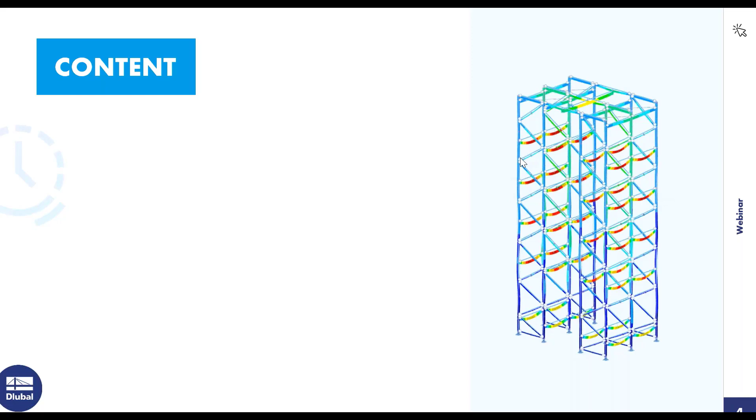Today, I will first show you the calculation workflow and then the modeling of special cross-sections in RSECTION. In the next step, I present the structure and the loads and go into the imperfections and the combinatorics. Then I design the cold-formed cross-sections in steel design and evaluate the results.

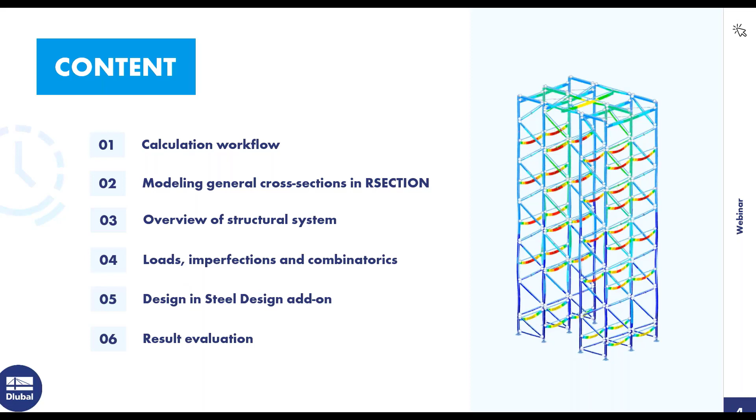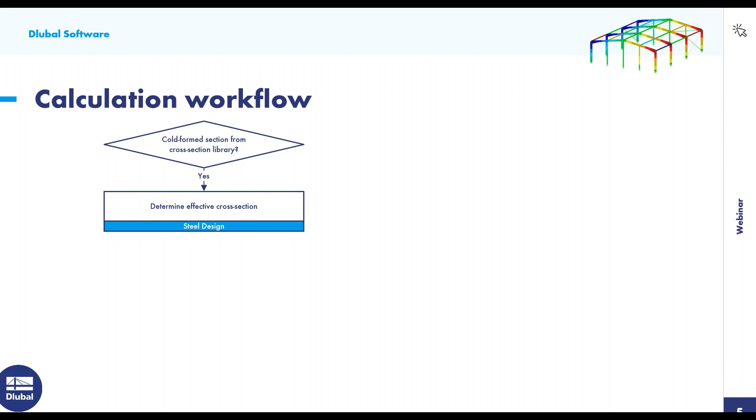If the cold-formed cross-section is included in the cross-section library, you can use this cross-section and determine the effective cross-section in steel design. If it's a special profile, you can create this cross-section in RSECTION. In addition to the steel design add-on, the RSECTION program and the effective cross-section extension are required to determine the effective cross-section in steel design.

It's also possible to determine the effective cross-section in RSECTION. However, this is not necessary for a design in steel design, but it can be used for the preliminary design.

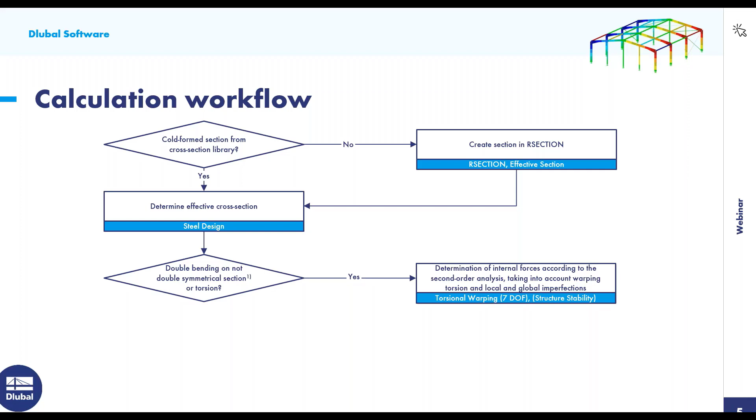No stability design is described in the standard for double bending of non-doubly symmetrical cross-sections or torsion. However, the standard allows a calculation according to the second-order analysis with the approach of global and local imperfections, taking into account the warping torsion.

In this case, only cross-section checks are required since all stability effects are covered by the calculation. The add-on required for this is warping torsion. If you want to determine the imperfection to be applied from the mode shape, the add-on structure stability would also be required.

I would like to point out that the draft standard of Eurocode 3 Part 1.3 contains a new stability design for biaxial bending in combination with axial force for single symmetric cross-sections.

If there is no double bending at the non-doubly symmetric cross-section or torsion, the stability design can be carried out using the methods described in the standards. In addition, cross-section checks and serviceability limit checks are also possible. Stability design checks and serviceability design checks are not implemented in steel design right now, but we are working on it.

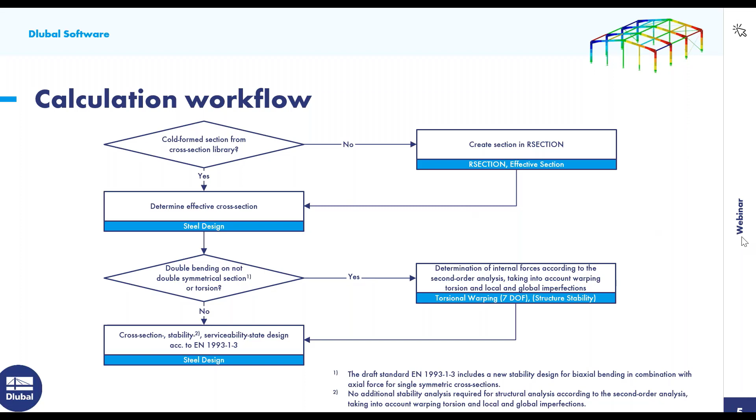The cold-formed omega cross-section that I want to use as an upright is not included in the RFEM cross-section library. I therefore create this cross-section in RSECTION. For this, I open the program RSECTION first.

The cross-section geometry is available as a centerline model in DXF format, so I can use the import function. For this, I start the import, go to Import DXF, and then I choose the corresponding DXF file and click on Open.

In the import dialog, I select the option to create elements on center lines, and here I define a thickness of 3.5 millimeters. With this import function, the part and the elements are generated automatically.

Elements are required for the calculation using the thin-walled analysis and for the calculation of the effective cross-section, since only then the subpanels are available. The subpanels are required for the classification and calculation of the effective cross-section. If no elements are defined, the cross-section is treated as a class 3 cross-section in the design add-ons.

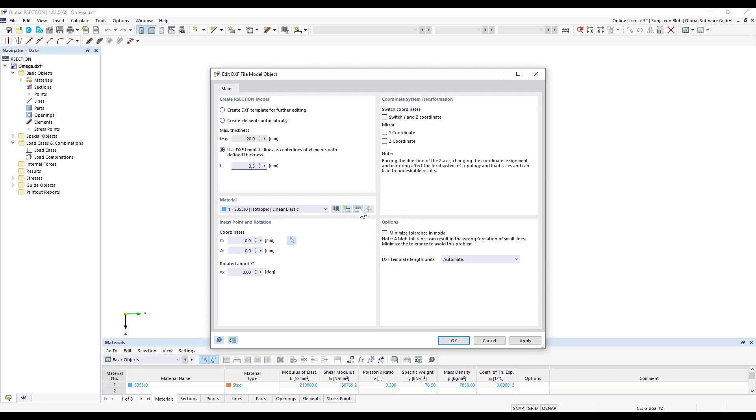Furthermore, I have to select the material. Here the material is already selected that I wanted, but if this is not the case, I can select it from the material library. You can open this material library via this button, and then select the material that you want to use.

Then I start the import. And the necessary part, you can see it here, is already created, and also the elements. If you click here on it, you can see the elements in yellow in the working window.

I want to choose the thin walled analysis. For this, I open the base data dialog, and here I choose the analysis method thin walled analysis. As already mentioned, elements must be defined for this. This setting affects the default setting in RFEM. If necessary, I can change the analysis method in RFEM.

Furthermore, I select cold formed as the manufacturing type, so that the design is carried out according to the standard for cold formed cross sections and steel design add-on. Currently, it's also necessary that the effective cross section according to EN 1993 part 1.3 is also selected here.

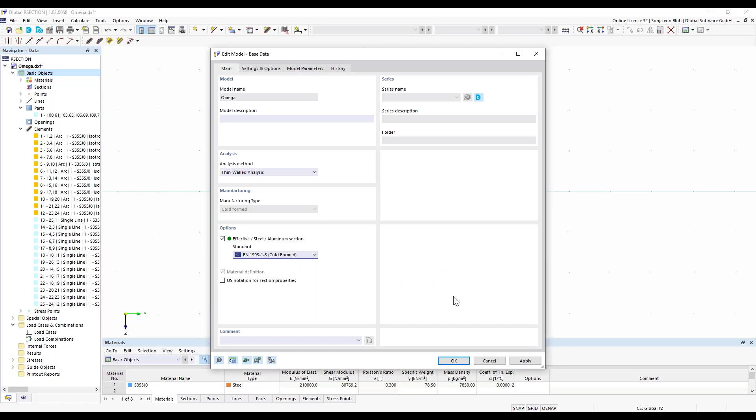However, this will no longer be necessary in later versions. In RSECTION, I can also calculate the effective cross-section and the stresses. This is useful, for example, for a preliminary design. This has been demonstrated in previous webinars, so I won't go into it today.

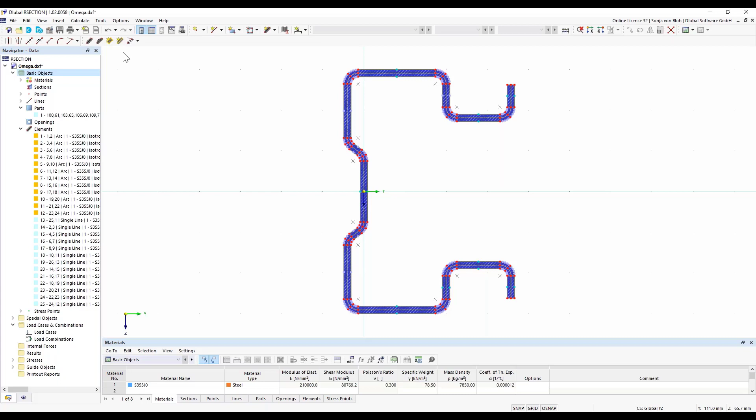However, it makes sense to start the calculation. I do this, and maybe we can also control the generated subpanels. That's okay, and then I save this cross section.

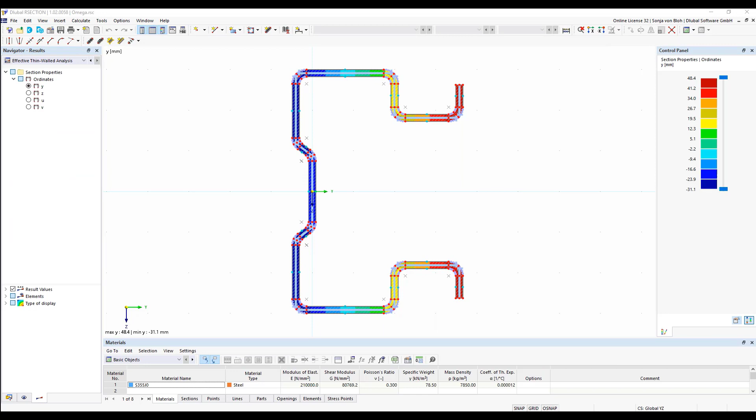I have already created the rack in RFEM 6. For this, I open the rack in RFEM 6 now. The uprights consist of the omega cross-section I just created in RSECTION.

I first import this into RFEM. To do this, I double-click on the uprights and then I open the cross-section library and click on From RSECTION. Then I choose the omega cross-section I just created in RSECTION.

The option Thin Wall Model is activated. This setting was taken from the chosen analysis method in RSECTION. However, I can also deactivate this option here so that the calculation of the cross-section properties is then carried out using the finite element analysis. If this option cannot be selected, then no elements are defined in the RSECTION cross-section.

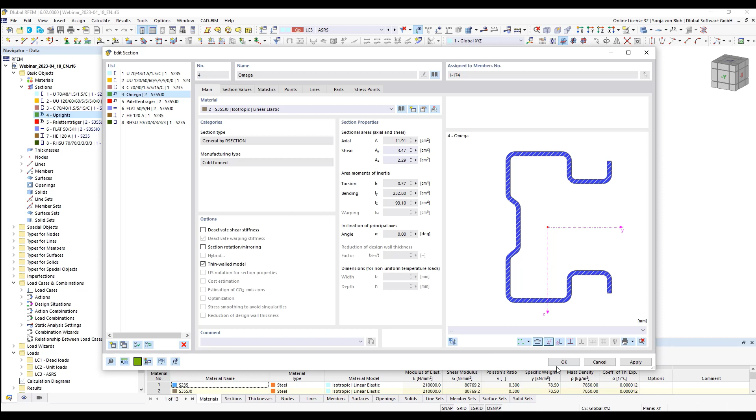Furthermore, the manufacturing type is set to cold formed. This setting was taken from the setting I defined in RSECTION for this cross-section. The special cross-section is also used as a beam. Here, these cross-sections are also created with RSECTION.

I open such a member here. The beams are connected to the uprights with screws. The connection stiffness is represented by a rotational spring. For this, I created a hinge.

I go to the top hinge and I show you the hinge now. Here a rotational hinge is defined with a spring constant.

In the cross-aisle direction, the rack is stabilized by a bolted framework made of cold form C sections. I open such a member here.

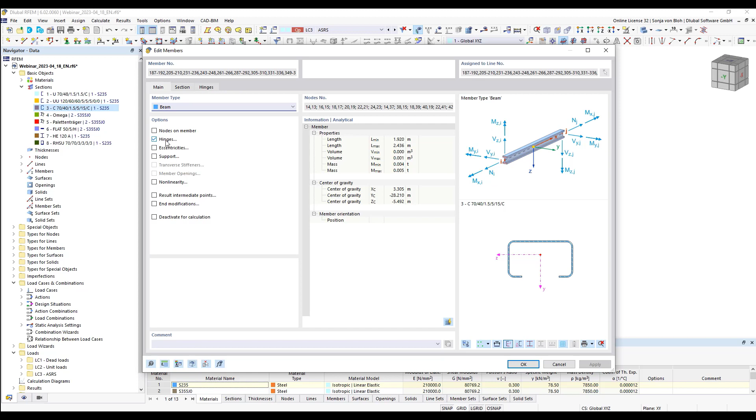In order to consider the shear stiffness, longitudinal springs at the ends of the bracing members are applied. Here hinges are defined. I show you this here. And here a translational hinge is defined with a spring constant.

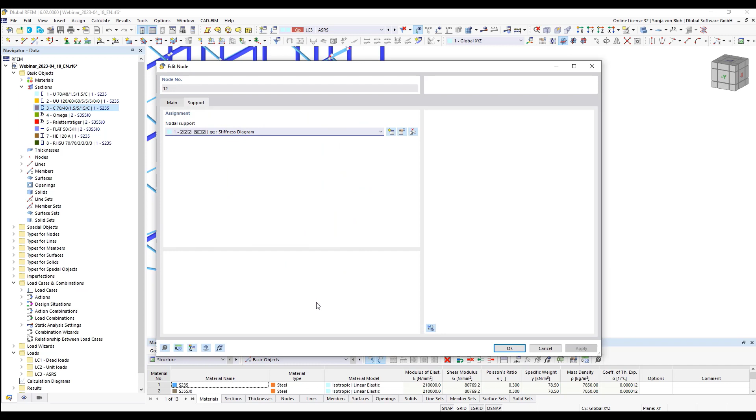The partial restraint of the upright base depends on the contact pressure between upright base and slab. Therefore, the rotational stiffness is to be taken into account. And here I show you the support.

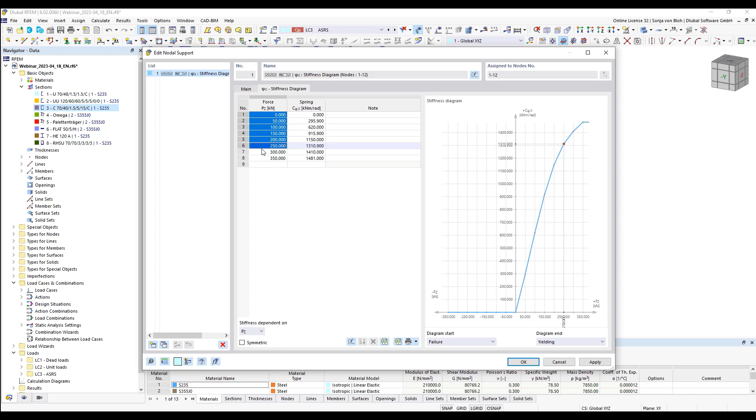Here a stiffness diagram is defined for the rotational stiffness, and the rotational stiffness is not considered as a constant but as a variable that depends on the compressive force. The stiffnesses of the joints are fictitious in this example and can be determined experimentally.

For example, the goods are placed by automated storage and retrieval system. The automated storage and retrieval system is guided on a rail on the floor and on a guide rail in the rack and aisle in the racking head. The aisle bar here serves to introduce the horizontal loads into the rack.

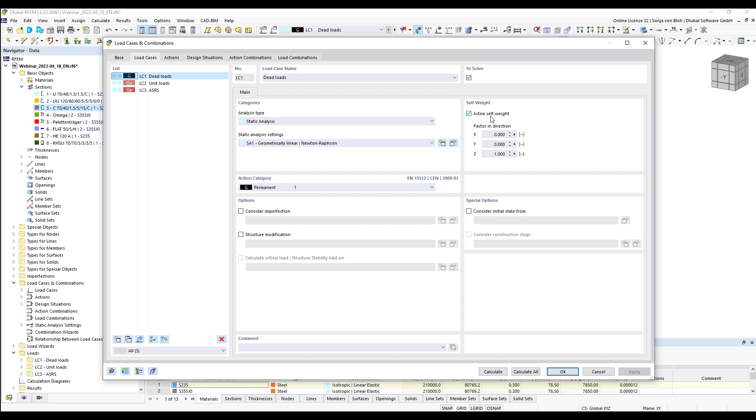Load cases are created for the dead load. I open here the load case for the dead load. Here the checkbox active self-weight is activated so that the self-weight is automatically calculated.

There's also defined a load case for the unit loads. I show you the unit loads here. The loading on the beams is assumed being distributed uniformly over the length of the beam. The unit load acts at the top of the cross section.

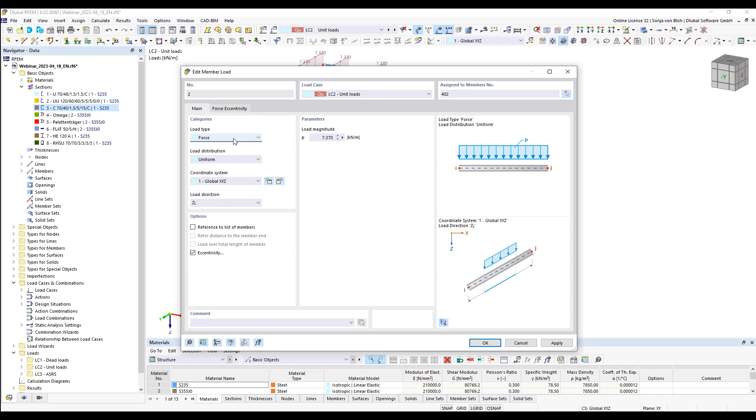I show you this. So for this, an eccentricity is defined here with a reference here on the top of the cross section.

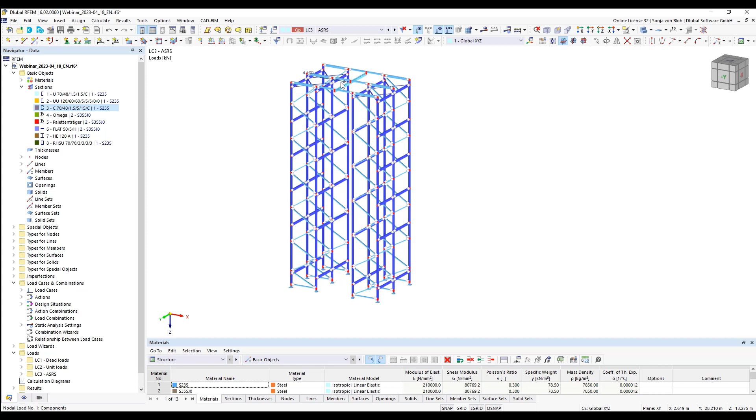In addition, another load case is created here for the automated storage and retrieval system in a horizontal direction. Here a nodal load is applied.

The stability design may be carried out as a cross-section check if an analysis according to the second order theory is carried out with the approach of global and local imperfections. To take lateral torsional buckling into account, it is important that the internal forces are determined considering the warping torsion.

I would like to demonstrate this on the stability design of the uprights. The uprights could also be designed with the stability designs described in the standards. As already mentioned, these have not yet been implemented but is in work.

For this, I first activate the add-on torsional warping and I click here on OK.

Warping at the member ends is assumed to be unhindered by default. To transfer the warping between individual members that are connected, you can define a set of members. The warping should be continuous for the uprights, which consist of several members, so that at every member start and end there are no releases for warping. It's therefore necessary to define sets of members.

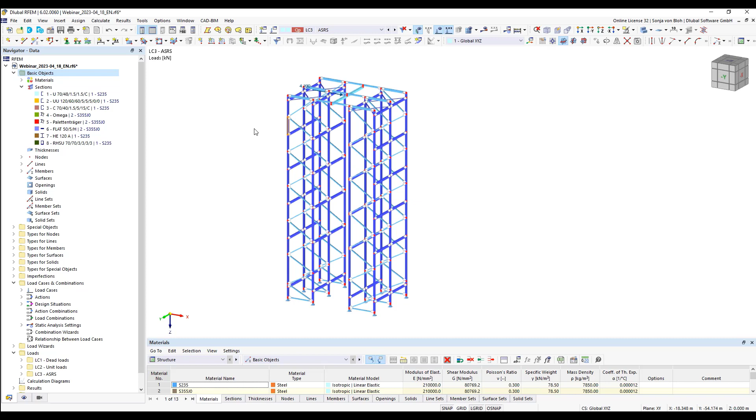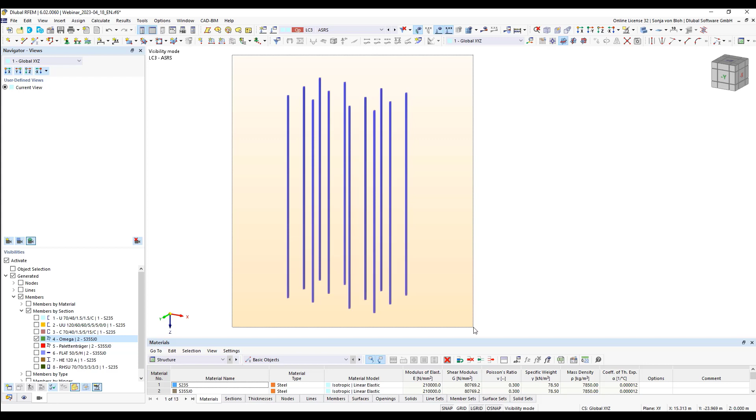I use a visibility setting to quickly select the uprights. To do this, I go to the navigator views and activate a view for members by section, and here I choose the omega section and activate the visibility. Now it's easy to select all the members with this cross section, then I right click on a member and choose the function create member set.

Then 12 member sets will be created. I look into one member set, and here you have the possibility to use the discontinuous torsional warping option to control whether the warping should be transferred or not. This is supposed to be transferred, so I don't check this checkbox.

Then I must define the imperfections. For this, I first create an imperfection case. I go to navigator data and choose new imperfection case. I first create an imperfection case called initial sway plus x, and choose the imperfection type local imperfections.

I click OK, then create a new member set imperfection. For this I go to local imperfection and choose new member set imperfection, from imperfection type initial sway, definition type relative, and I define a relative initial sway of 1/500 in the direction of the global x direction.

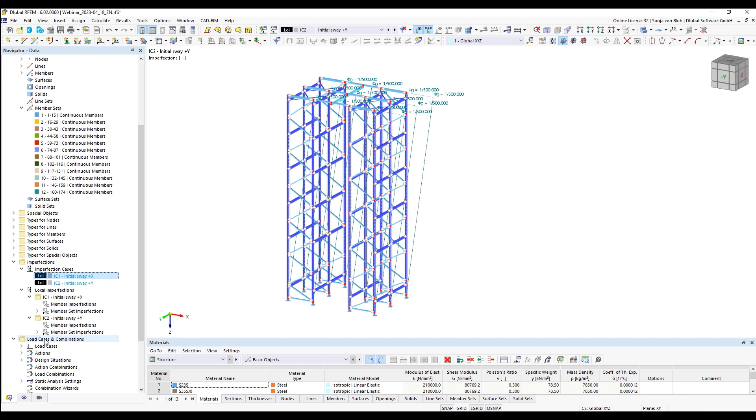For the initial sway plus y, I copy the imperfection load case I just created. To do this, I open this imperfection case and choose copy selected imperfection case. Here I edit the name, click OK, and then modify the imperfection direction for this imperfection case to y.

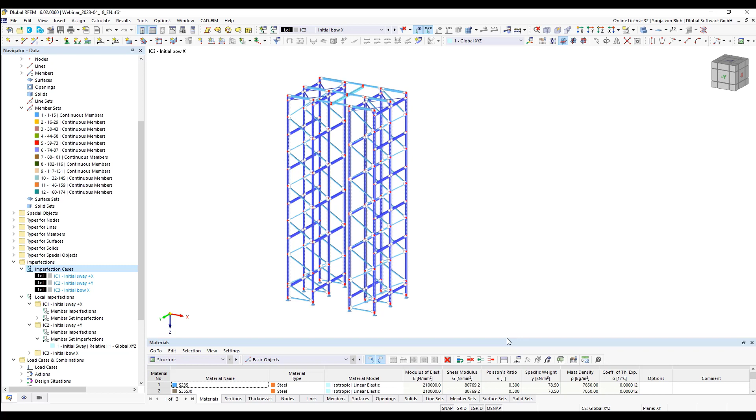First, I define a visibility for the uprights. To do this, I select the uprights first, then choose visibility by selected and related objects. Then I choose the wireframe model, and I want to show also the numbering.

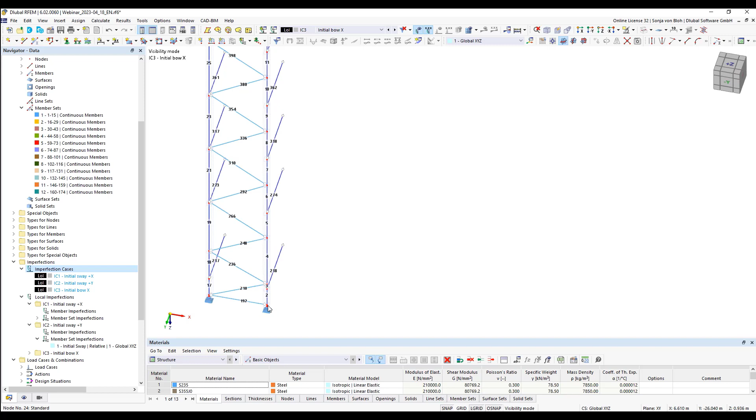For the cross aisle direction, I define the intersection of the diagonals as the length, so from here to here and from here to here.

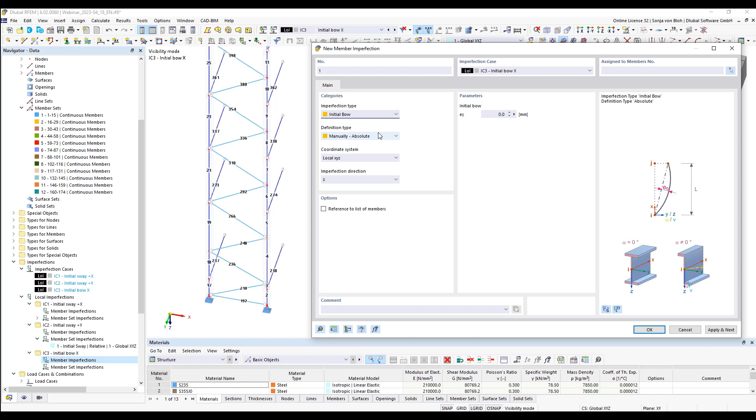For this, I create a new member imperfection. So here, new member imperfection, from imperfection type initial bow, definition type manually relative, and for the omega cross section I use buckling curve B, so that I define an initial bow of 1 divided by 250 in the global direction plus x.

Since I'm defining the initial bow using several members, I activate the option reference to list of members. Then I select the appropriate members. Here I define 1, 2, 3, apply and next. Here you see the generated imperfection.

Here I change the imperfection direction. Next member is 4. Next member is 5 to 6, 7 to 8, 9 to 10, 11 to 12, 13 to 15, 16 to 18, 19 to 20, 21 to 22, 23 to 24, 25 to 26, 27 to 29.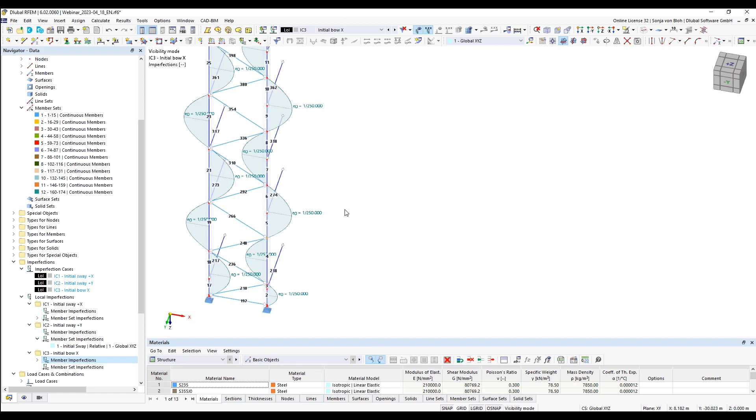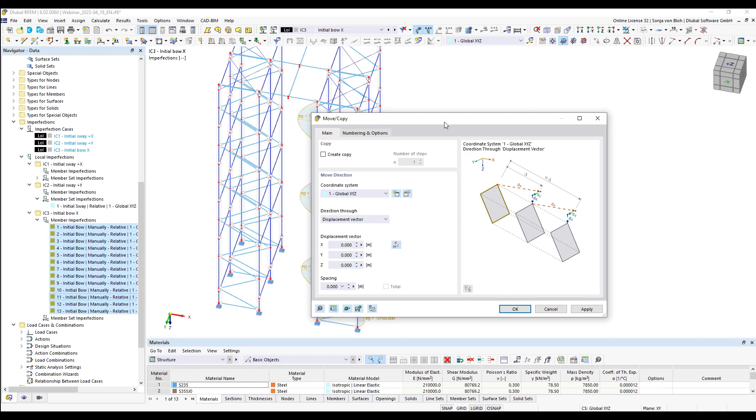Now I copy these imperfections in the down aisle direction. For this, I cancel the visibility mode. I don't want to show the numbering, and now I select the imperfections that I want to copy. Then I choose copy, create copy, 2 copies, and then I have to select the displacement vector in the graphics, choosing these nodes, then click OK.

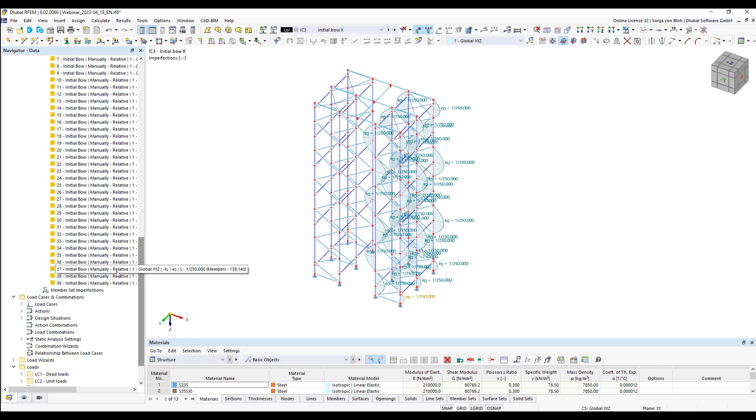I will copy these imperfections with a mirroring. So I choose mirror, create copy in plane YZ, and then I have to choose the point. I choose this point, and then click OK.

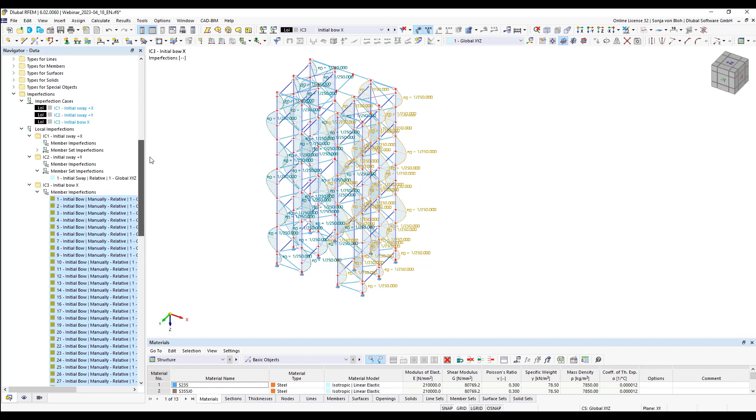For the initial bow in Y, I create an additional imperfection case. So here I create a new imperfection case, initial bow Y, from imperfection type local imperfection.

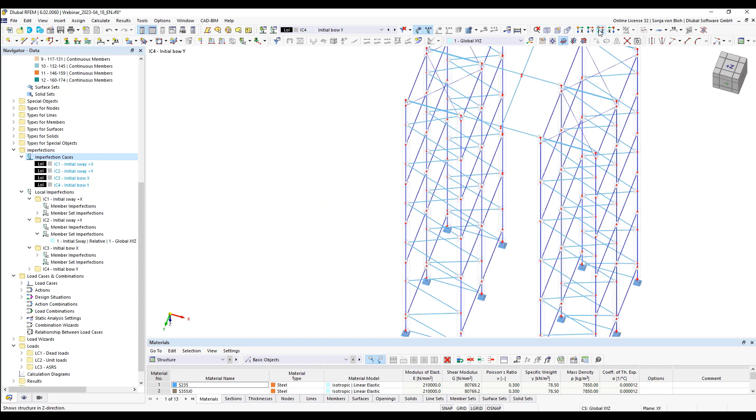First I define a visibility. Here I choose the uprights, visibility by selected and related objects, and I want to see the numbering. For the down aisle direction, the length is the distance between the beams, so the distance between these beams.

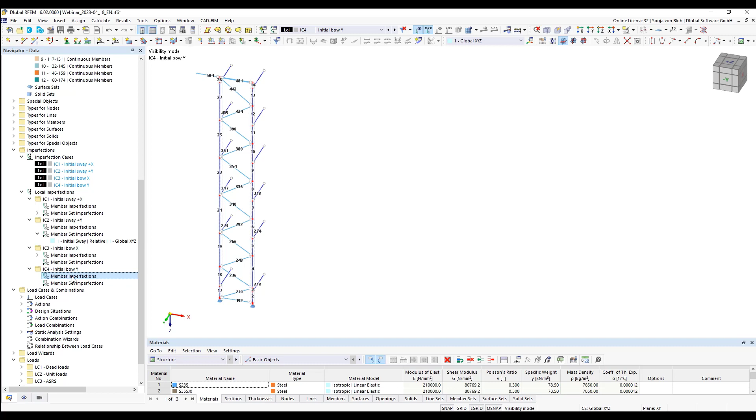I create a new member imperfection for this, so here new member imperfection from imperfection type initial bow, manually relative, same initial bow as for the X direction, also in global direction, and imperfection direction is now Y, and here I have also to activate this option.

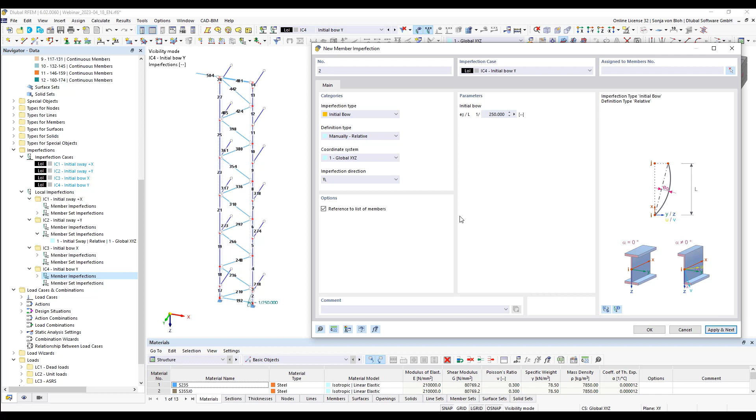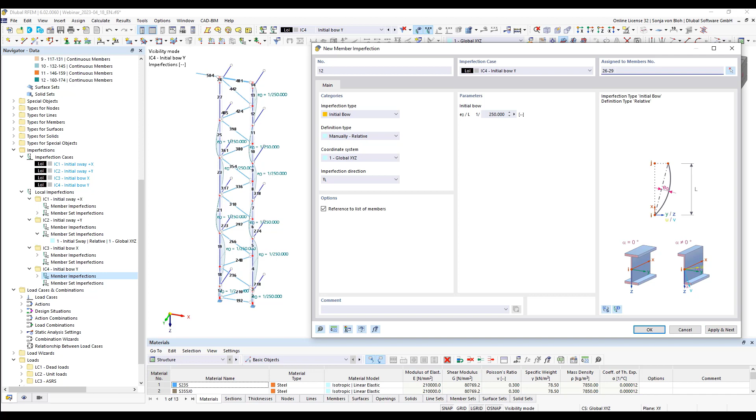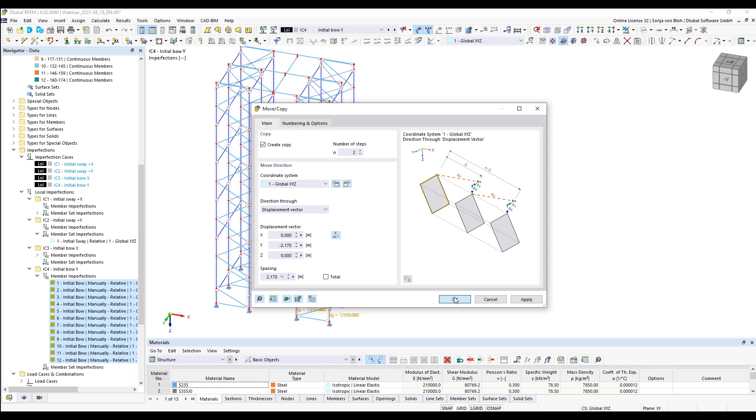Now I copy these imperfections again. For this I cancel the visibility mode, don't show the numbering. Then I select the initial bow imperfections to be copied, then create the copy, and then I will do the same by mirroring.

I would now like to combine the imperfections with each other. According to EN 15512, imperfections do not need to be considered simultaneously in down aisle and cross aisle directions. For the combination of imperfections, I create a group of imperfection cases.

So I go to imperfection case, new imperfection case. I choose the imperfection type, group of imperfection cases. Here the inclination plus x is to be combined with the initial bow x. So I define a name, IC1 plus IC3, go to tab group of imperfection and choose IC1, add a new imperfection case with operator and, choose initial bow and x.

Then I create a new imperfection from type group of imperfection, here IC2 plus IC4. I choose here initial sway and y, choose the operator and, choose the initial bow and y. I want to create also a group of imperfections: initial sway plus x minus initial bow in x.

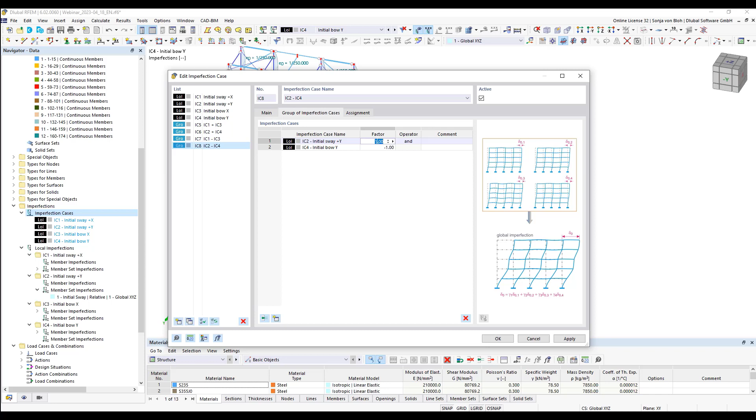For this I copy this group of imperfections and then I change the name and change the factor to -1. I do the same here. So that the individual imperfections are not taken into account in the combinatorics, I deactivate for them the checkbox active, and then I click on OK.

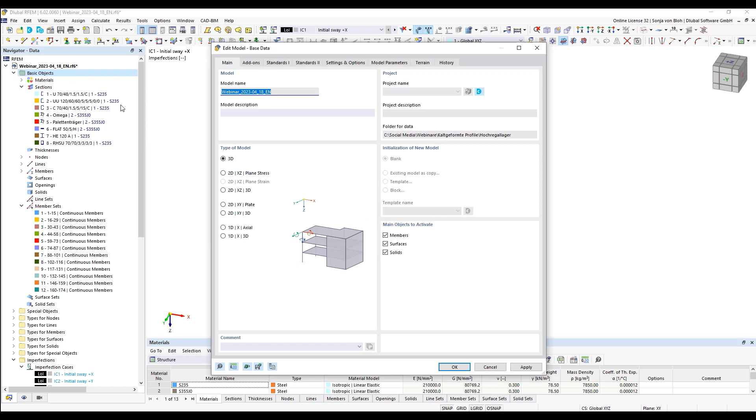The combination of load cases should be in accordance with EN 15512. I go to the base data. Here I've already chosen that I want to classify my load cases, and for the classification I have chosen already the standard group of EN 15512.

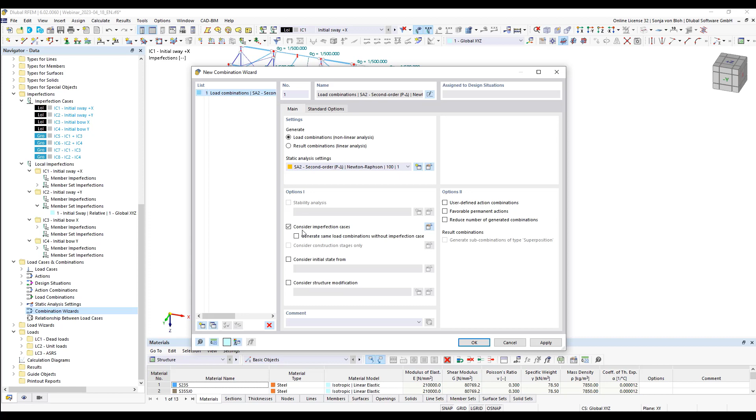I then create a new combination wizard because I want to automatically create my load combinations. For this I choose the new load combination wizard. I want to create load combinations, so I check this option, and I want to generate load combinations according to second order analysis, and I also want to consider my imperfection cases in the load combination, so I activate the corresponding checkbox and click on OK.

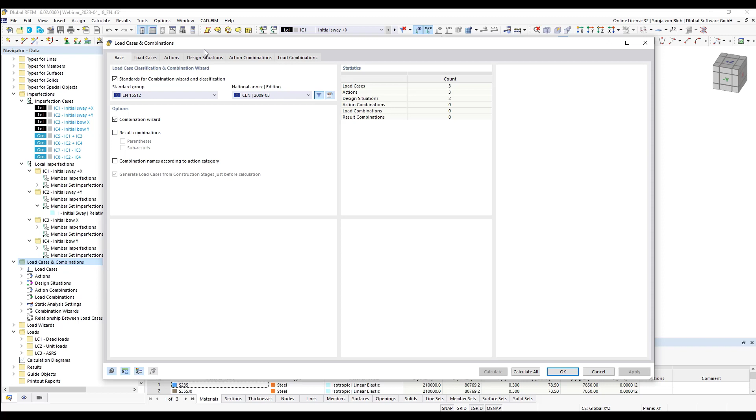Then I go to the load cases and combinations. Here the standard for combination wizard and classification is taken from the base data dialog, and it's important that the checkbox combination wizard is activated for the automatic generation of load combinations. Then I go to the tab design situation.

Here two design situations are already created. This is the design situation for all variable actions and for one variable action. If you want to see information about combination rules, you can click on this button.

So that the combinations are automatically generated, I have to assign to the design situation a combination wizard, and I choose here the combination wizard I've created before.

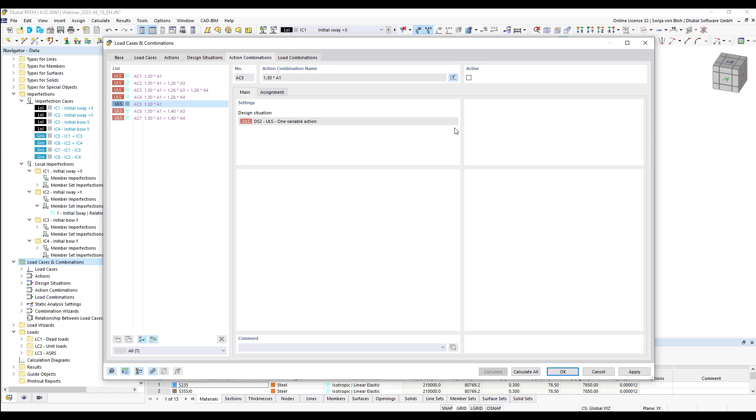Then I go here to the action combinations. Here the action combination 5 is the same as action combination 1, so I deactivate this, and then I go to the load combination, and the load combinations are generated. You see here for CO1 the group of imperfection 5 is considered, CO2 the group of imperfection 6, and so on. Then click here on OK.

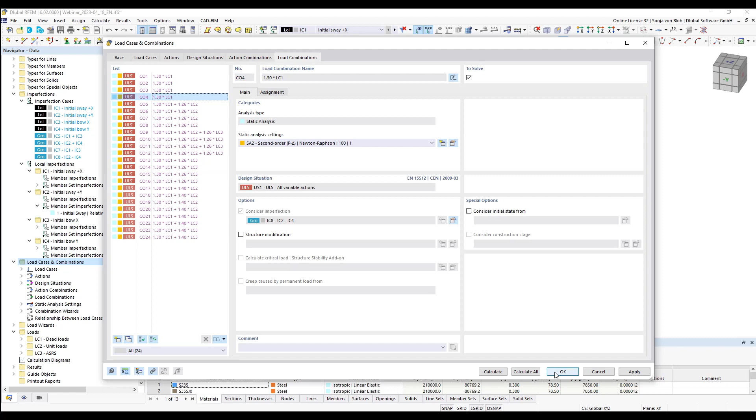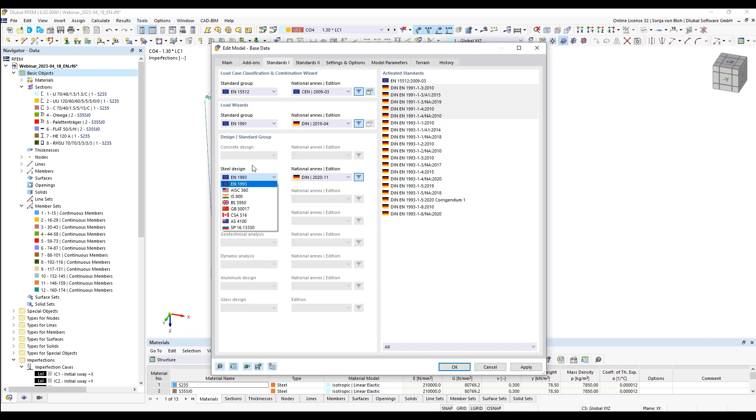Then I activate the steel design add-on for my design in the base data. I go to the add-ons, activate the checkbox steel design, then I go to the standards, and here I choose the desired standard. Here I want to do the design according to Eurocode 3, so I choose Eurocode 3, and we have several national annexes implemented, and I choose this national annex. Then I click on OK.

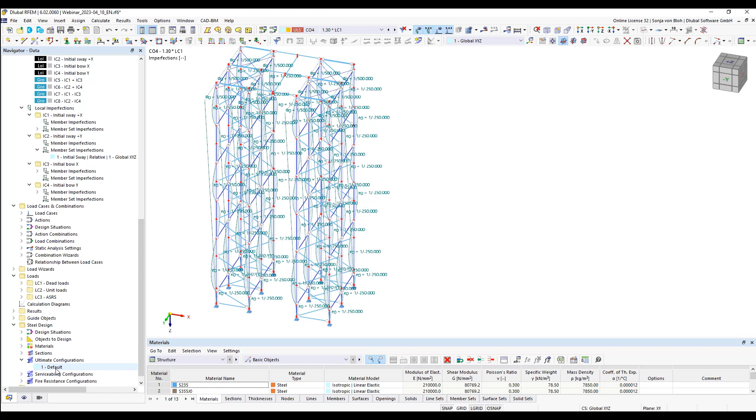Then I go to the steel design settings, and I want to look into the ultimate configuration. I open it, and in the ultimate configuration I deactivate the checkbox perform stability analysis, since all stability effects are already included in the calculation. Therefore only cross-section checks have to be carried out, but with a safety factor gamma M1 for stability design. That's why I activate this checkbox.

Steel design derives from the manufacturing type whether the design must be carried out according to Eurocode 3 Part 1.1 or Eurocode 3 Part 1.3 for cold formed cross sections. However, by deactivating this checkbox, I can enforce that the design according to Eurocode 3 Part 1.1 is also carried out for cold formed cross sections, but I want to do the design according to the cold form standard, so I activate this checkbox again.

Chapter 3.2.2 allows the use of an increased average yield strength due to cold working. You can select here the forming factor required for the calculation. However, the increased yield strength is only determined for cross sections from the database. I click here now on OK.

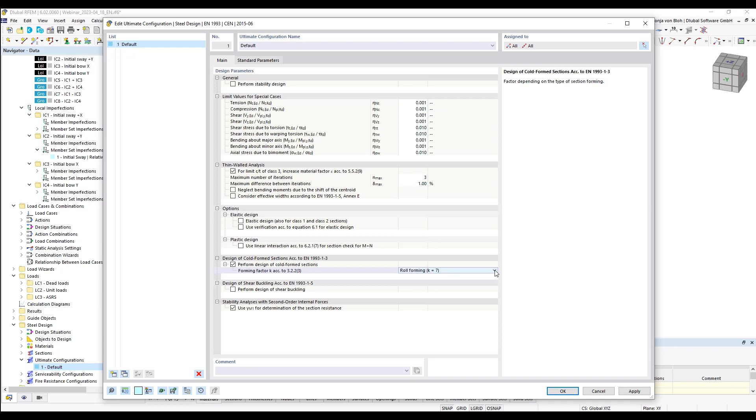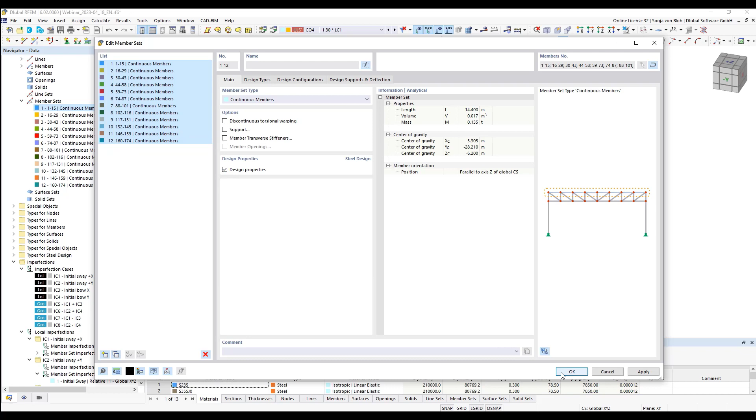In order to design the member sets and not the individual members, I have to activate the design properties for the member sets. So I go here to the member sets, select all my member sets, and activate the design properties for them. You can see if you go into the member of the member set that this member is designed via the parent member set.

Then I go to the table steel design and to the design situation. Here I assign the design situation type permanent and transient, and I don't want to design situation one, so I deactivate this checkbox. Here I only want to design the load combination 18.

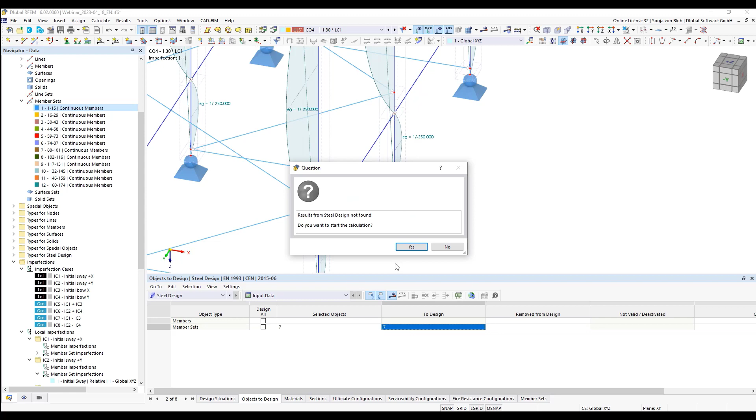Then I go to the objects to design. I don't want to design the members, I only want to design member sets, but not all of them. I only want to design member set number 7. So I choose this and then I start the calculation. Now the internal forces are calculated, and then the effective cross-section in steel design will be calculated, and then the design will be carried out.

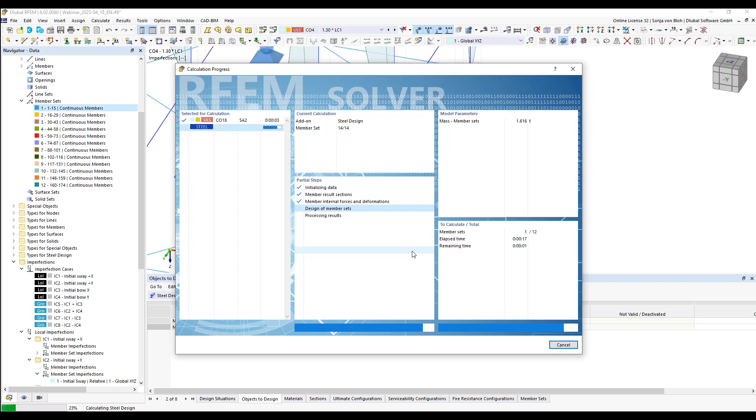Okay, now I see the design check ratio here on this table. If I want to see the details, I have to double click on this to open the design check details. And now 3 effective sections are calculated.

These are the effective cross-sections for pure axial force, for pure major axis bending, and for pure minor axis bending. If you want to see the details of the calculation, you can see them here, and also you can see the effective section properties.

The additional bending moment resulting from the shift of the centroid is also calculated. You can see this moment here in the design internal forces.

The effect of distortional buckling is also considered. It's determined using the eigenvalue method, and you can display the mode shape in the cross-section information. I will show you this.

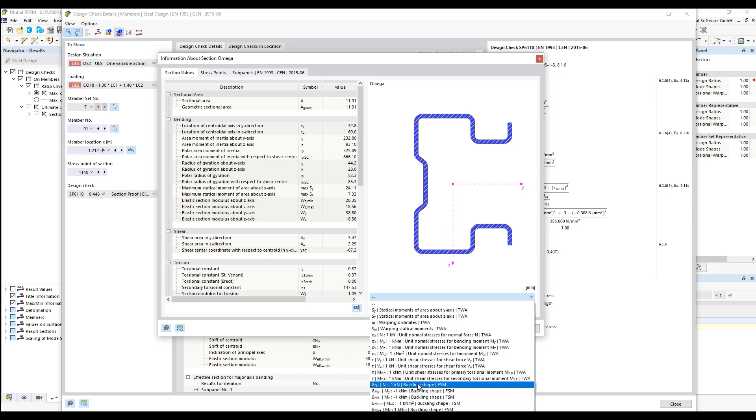I open now here the information about this cross-section, and here you have the possibility to choose the buckling shape for pure axial force, or for pure major axis bending, or pure minor axis bending. I choose here the buckling shape for pure axial force, and by default the mode shape for distortional buckling with the associated critical load factor is displayed first, but by clicking on the points in the graphic, further forms of instability can be displayed.

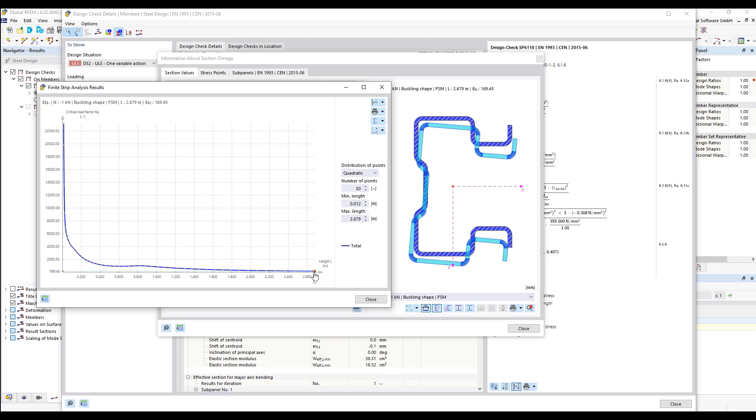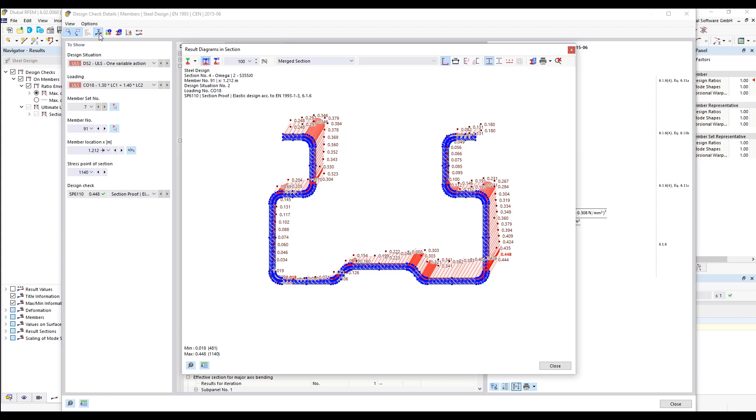It's also possible to display the stresses graphically. To do this, I open the window Result Diagrams in Section. It's possible to display stresses here on the gross section, and it's also possible to display the effective section with the stresses on the effective section due to axial force and bending moment.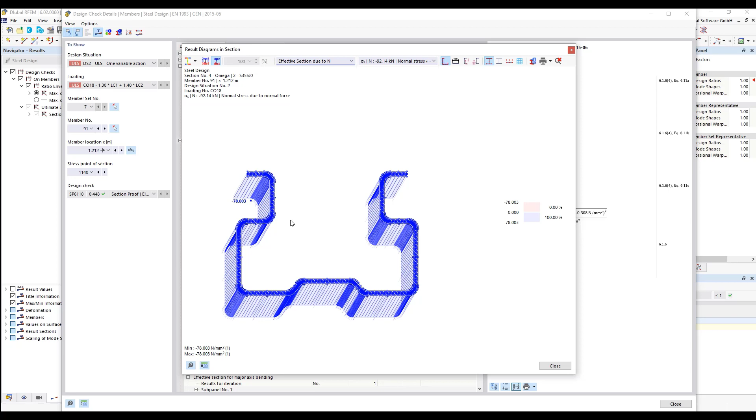I will do this here for the axial force. The effective cross-section is not much smaller than the gross cross-section because of the stiffness, but if you zoom into this graphic, you can see a small reduction of the thickness.

That brings me to the end of the webinar. I hope it helps you in designing cold formed cross-sections in steel design. I now give the floor back to Andreas.